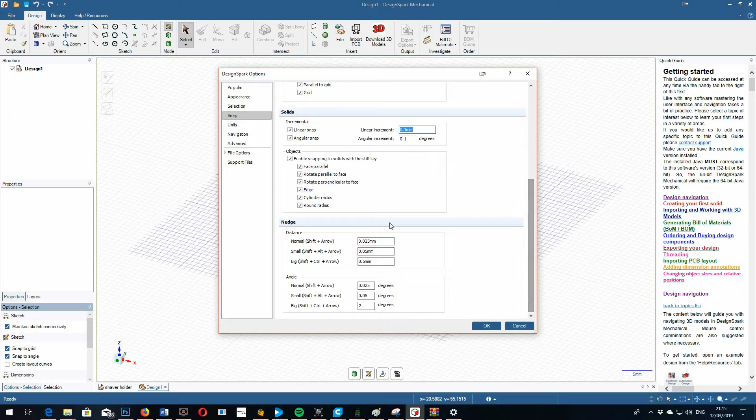So in here you can change those snap settings if you can't quite click on the line, but for the most part you'll just be able to click on the line. It'll automatically click to the line.

So there's three modes in here. There's a grid mode where you draw onto this grid, and then you've got this hatch mode here which is partial grid and partial 3D, and then you've got full 3D mode which is just 3D in 3D space.

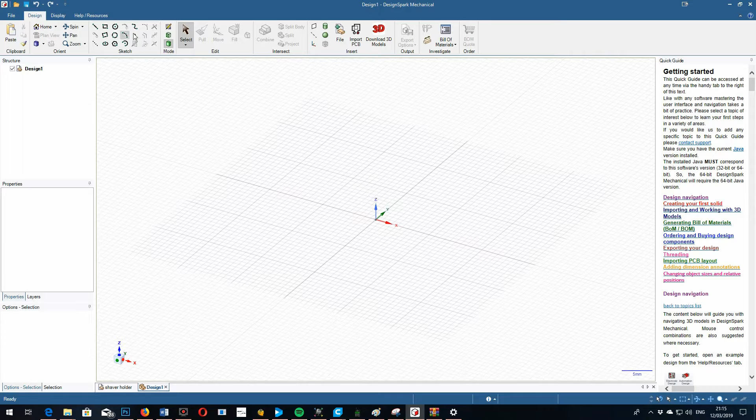Some of your drawing tools you've got here: rectangle, a three point rectangle, circles, arcs and stuff like that, splines and things, so your basic drawing stuff. These are really all you've got to play with. You haven't got to do much other than that.

So I'll just show you what you can put in your basic shapes here, but I very rarely use any of those. So if you click on the grid like that, and you just click anywhere, if you type V, it will come to an over the top view. So this view here is an over the top view.

So if you wanted to draw, the way I always do it is I always normally start side on or plan view, it doesn't matter. But say if you're doing a charging base, let's just show you for instance.

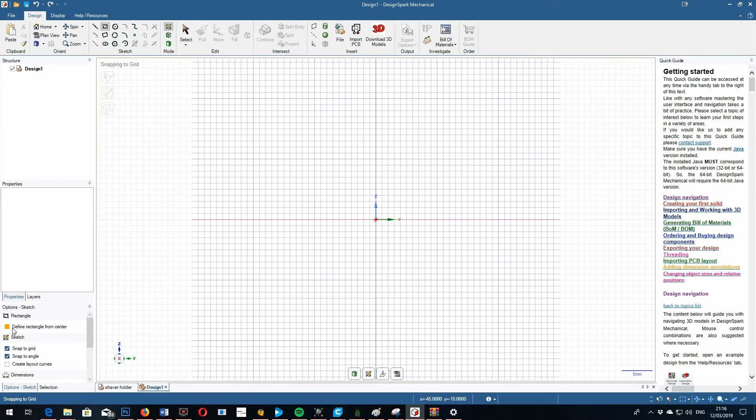Now if you pick up a rectangle there, if you want to make it a rectangle base, if you click on define the rectangle from the center and you click in the center of the screen, it'll actually define it. As you click and hold, it will define it, and you'll see the scale coming up on the side there.

If you press and hold the space bar, like that, you see how that's highlighted 36. That will be your width, so you can change that now to anything you want without having to drag it. So let's make it 50 mil wide, say.

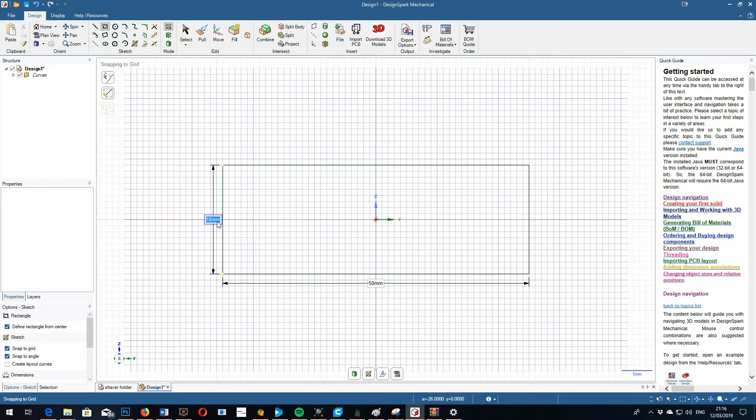Okay, and then you'll see automatically it's changed to the depth dimension there, but you can tab between the two. So if you press the tab key, it will change between the two there. So if you click on that one, so if we make that 30 mil high, so side on, that's now 30 by 50 in size.

If you press enter or press escape, that will get rid of that for you. So you've got your basic shape.

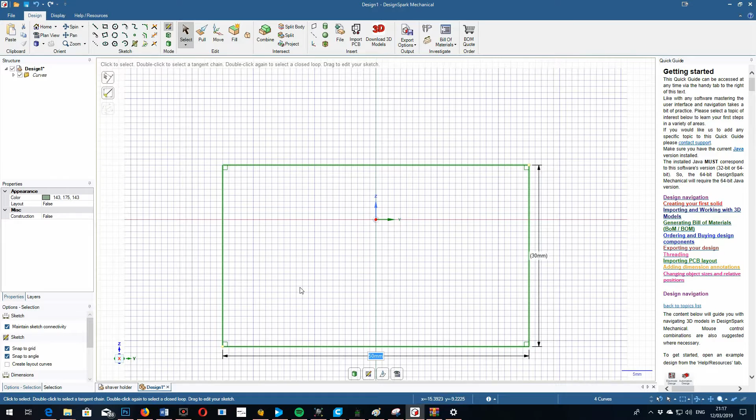Now if you want to move this shape onto the line, if you double click one of the lines, it will select all of the lines like that, you see, and then you can actually go to this option here to move, and you click on the green arrow in the middle there, not the red because that's left and right, it's this arrow here, because remember you're still working in 3D here.

And then you can bring, if you drag that circle and you drop it down to this line here, you see how it's turned to a square? Well, now it'll actually move. This is the origin of the object now, so it'll actually move from this origin point.

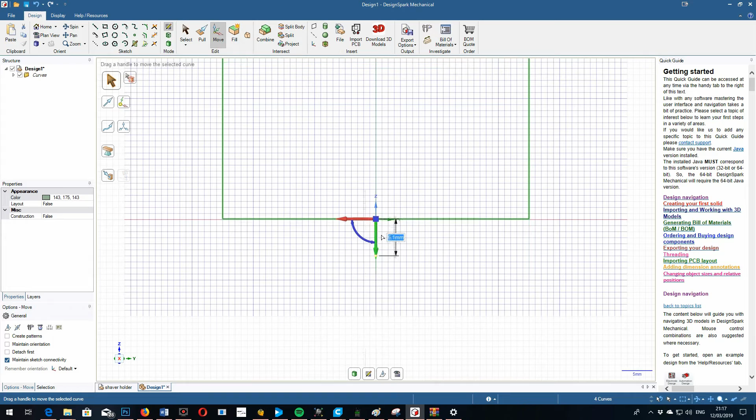So when you actually move up there, it'll actually drop it right on the line for you, more or less. My snap's a little bit tight, but if you put a cross in there, it will definitely drop it. It'll drop to the intersection of that line.

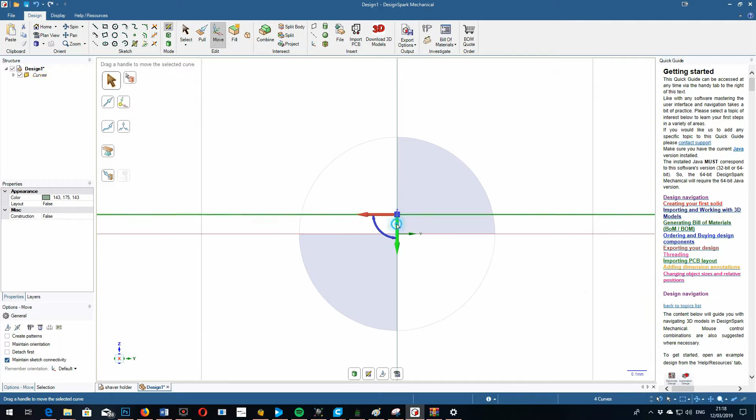So if we have a little look and see how close that's got, yeah, because I've got a very fine snap I'm working with on here. So if you click on the arrow like that, and then you see it's dropped onto the grid now.

Okay, so now it's important to try and keep the object on the grid. It just makes things a lot easier.

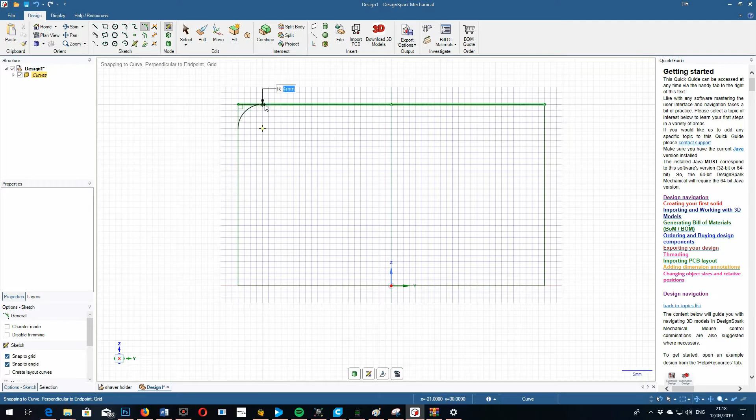Now what I find is it's very tempting to put rounded corners on now for your shape, which you can do if you go up here and click on rounded corner, click there and there, and it will do a 5 mil radius for you. But you can do that afterwards, so you don't need to do it here, but you can if you want to. For instance, you could put another radius 6 mil there, and you could get carried away and do an even bigger one there. Oh, hang on, like that, okay, odd shape.

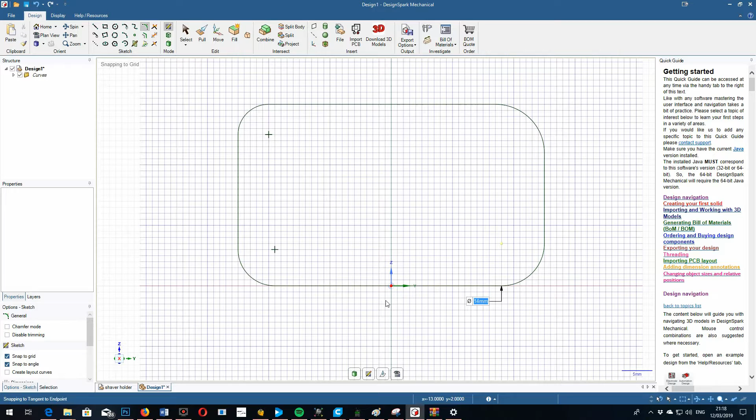But if you don't like any of that, you've got multiple undos here, so you just click undo, undo, undo, undo, and it'll go all the way back to where it was. That's really useful, the undo feature, and you can keep going back on that and go all the way back. It's amazing.

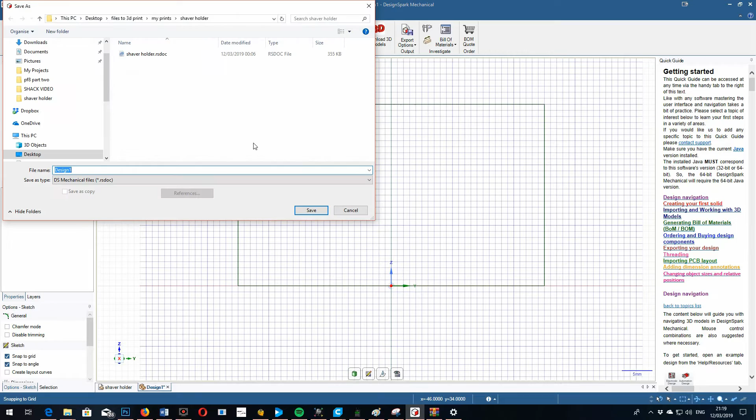What you want to do before you do anything, in case it crashes, is save it. So first you click on save as, and then you save it somewhere and just call it, I don't know, Lewis, like that. That's not saving it as an STL, you're just saving it as an RS design document at the moment. This is not about exporting it.

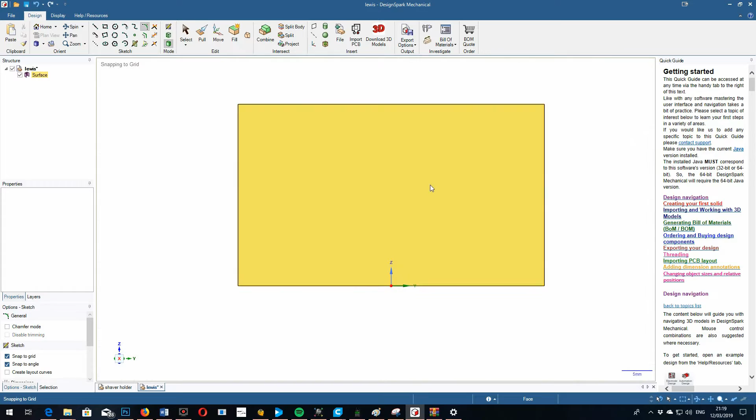Okay, so that's very basically your very basic shape, but you want that to now be in 3D. So what you can do when you change to this mode, you'll see how that's changed to a solid shape now, which is flat.

If you imagine in 3D space, if you go to the spin option here, you click on that and you click and hold the spin, and then you can spin that around in 3D space. You with me?

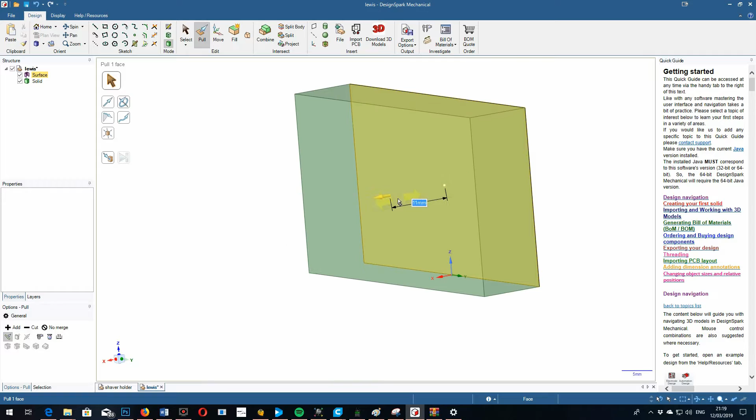Okay, and then what you do if you want to fill that out is you click on pull, click on the face you want to pull, and hold, and it will pull that face out. So let's say we want to make this base 50mm wide. Again, you can either drag it out to 50, or you can press the space bar while you're dragging, take your fingers off, and then type 50 in there, and that's got your 50mm.

And then you can spin around. There's your 50mm shape. If you've got a wheel mouse, wheeling in and out zooms you in and out, so you can spin around.

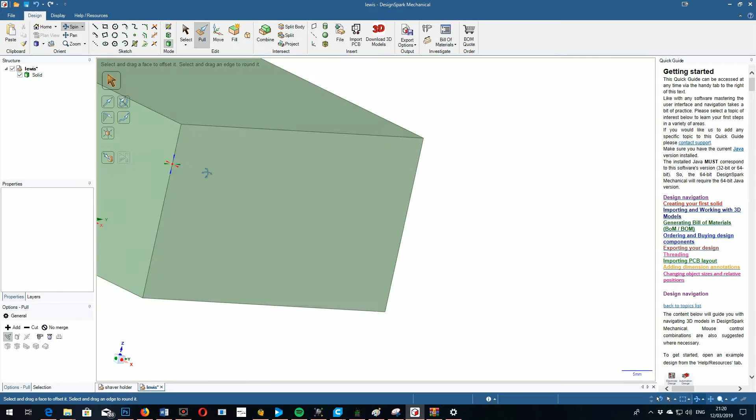Now what you can do here is, if you want obviously to get a cutout in the top of it to drop something in it, you spin it round, click on select, hit the face that you want on the grid, and then press the V button, and it will orient that top down so you can see it. Then you need to put the grid on top of it.

Anything you draw on this grid will be added to the shape. If you don't want to add it to the shape, you can pull the grid off of the object that you've got. So if you click on that move grid icon, and then spin the object round like that, you can click on the grid again, click on that, and pull that arrow, and it'll pull the grid away from the object. So you can pull it away, and that way whatever you sit on there is not going to be added to the object, it's not going to join up with it.

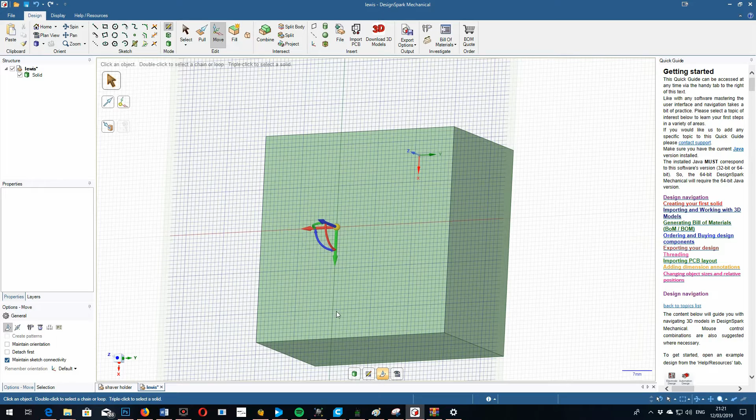Okay, so if we do that, if you press V again, now we're hovering above the object, so what we create here will not be added to the object.

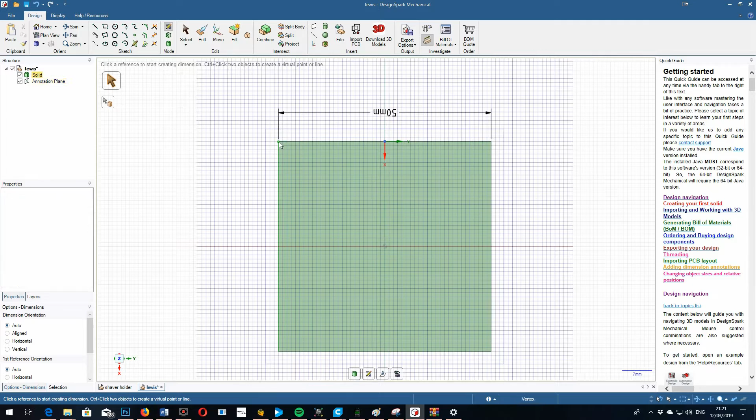The other thing you can do, if you're not sure about your dimensions, is click the little dimension thing and you can get the size. So you can see here we're upside down, but it's 50mm, so we know that's 50mm - it's this little ruler thing. You click on there again, and you can see it's 50mm square. You can turn these off if you don't want to see them; in the annotation plane, just switch them off and they'll go.

Okay, so what you do then, say it's a docking station, you click on your rectangle. Remember, define the rectangle from the center and draw in your shape roughly. So let's say that's going to be something like that, for instance. Okay, now that isn't on the actual object at the minute.

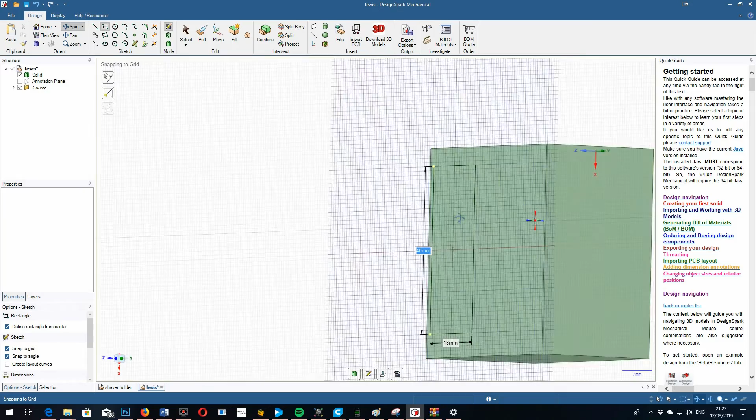If we put that into spin mode, you'll see that the grid is hovering. You see that? It's hovering above the object, right? Press V to square it up again to get your view straight. Then, if you click on pull, you see how it changes to 3D mode. You see how this now is a square there and a square there, but they're separate squares.

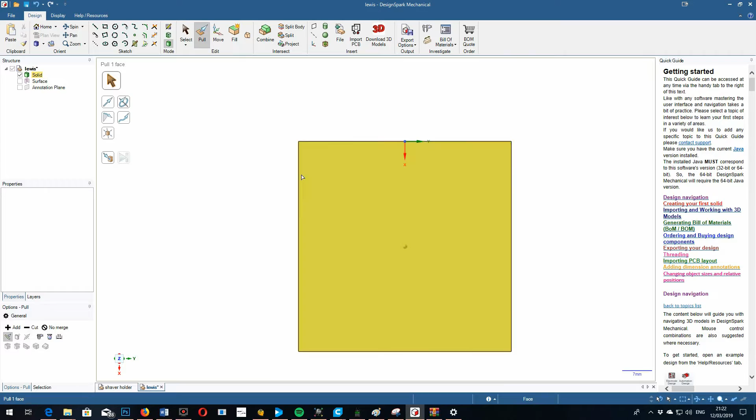See here? Surface, you can turn these surfaces on and off, so we can make that disappear, look. On, off. Okay, same with that one. On, off. We can hide ones, so it's really useful this. You can hide whichever surface you don't want to play with. But what I'll show you here is how you cut a hole through that. That's probably quite a good one to show you.

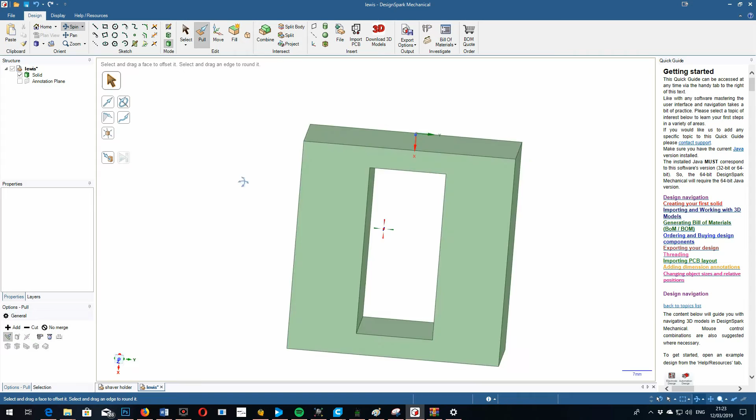So if we spin this round, if we click on the pull feature there, you notice over here you can either add material when you pull or cut it. If you don't do anything, it'll cut it out. So as you drag that shape through, look, it's cut a big hole through the middle of your base. Obviously you've got your undo, so click on your undo, click again, there's your undo.

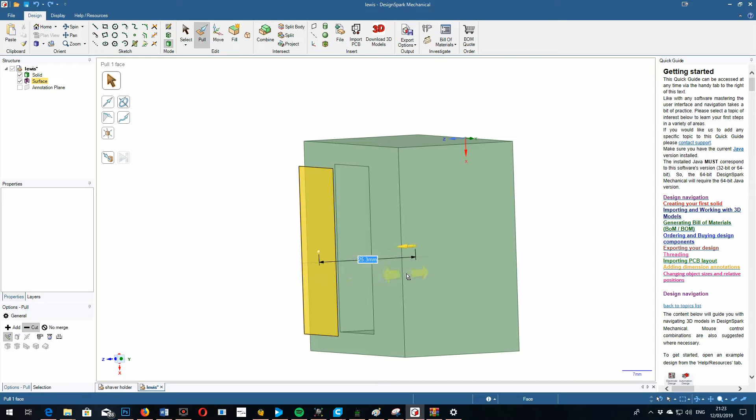Okay, so we want this. There's other ways. If you lay it flat on the base, you can measure how deep the hole is. But I'll just show you here. So we'll do cut, and we'll just drag it into there. You see how the distance changes there? That's the distance away that it's going to cut. That's not the depth of the hole. It's the distance from the top.

So we'll just drag it down, say that much. You can do this more accurately if you want to. But there's your shape, your basic depth. You can measure this if you want to, you can see how deep it is. So you can click on either this one, which is for the dimensions, or this one, which is the calipers feature, which is quite useful.

Let me just see how long this video is. I was just checking that was recording. It was recording. So yeah, where were we?

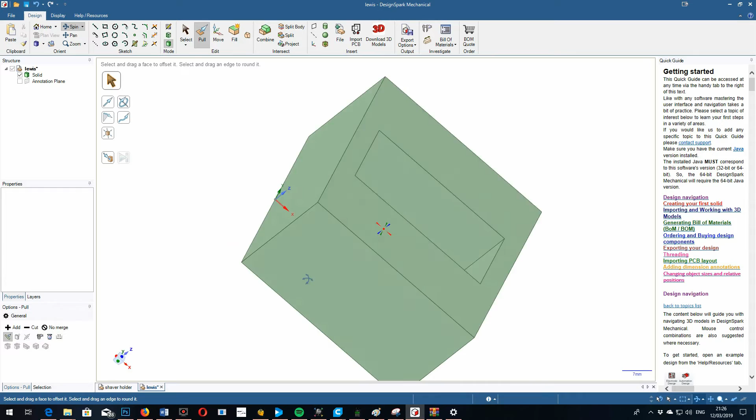Okay, we've got our basic shape cut out in the base there, Lewis, as you can see. If you wanted to measure the depth, just click on the calipers, click on that little line there, and it shows you, look, 17.8 millimeters deep that is. So if that isn't deep enough, you press escape and then go back and select your pull, you can make it deeper.

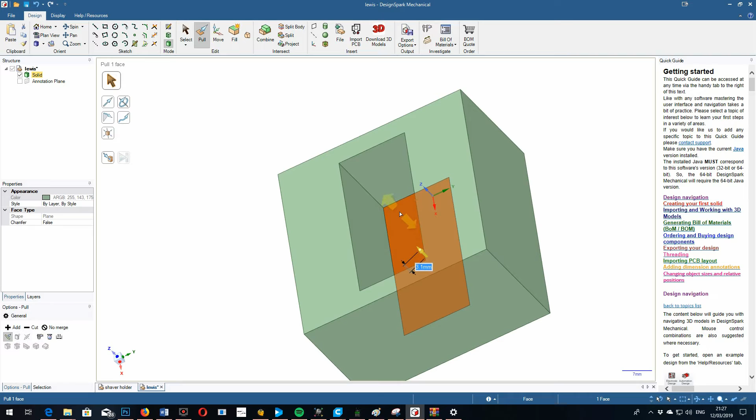And so you're 17.8, so now you've got to do a bit of maths. Look, you've got 20.8 now, haven't you? Because you've gone 3 mil down, or 3.1. If you press the space bar, like I said, then you just type in the depth that you want, okay? And then again you can spin round.

For moving around the object, if you click and hold, you can spin. If you hold the shift button while you use that, you'll move it left and right, okay? Zoom, I use the mouse wheel in and out. You can pan around with the left or right mouse button, okay? So if you press escape.

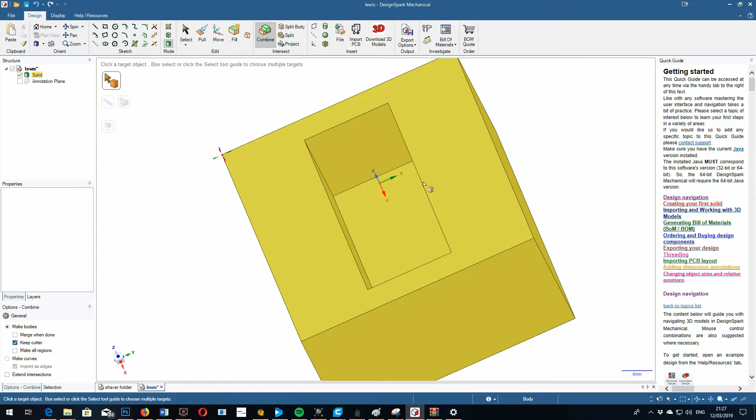Okay, so we've got our basic shape here, but Lewis says, oh, I think I want it a little bit more rounded. I don't like the sharp edges. That's easy. Now, if you want to make all of the edges soft, so say this top edge, you want to make this rounded, round the top, make it a bit better looking.

If you go to pull, I'll show you on the one edge. If you click on just one edge, you see the options that come up. You've got rounded, chamfered, you've got extrude the edge. So you can pull just that edge up if you want, or you can pivot the edge so it's got a slant on it, okay? Most of the time you'll be using the rounded edge here.

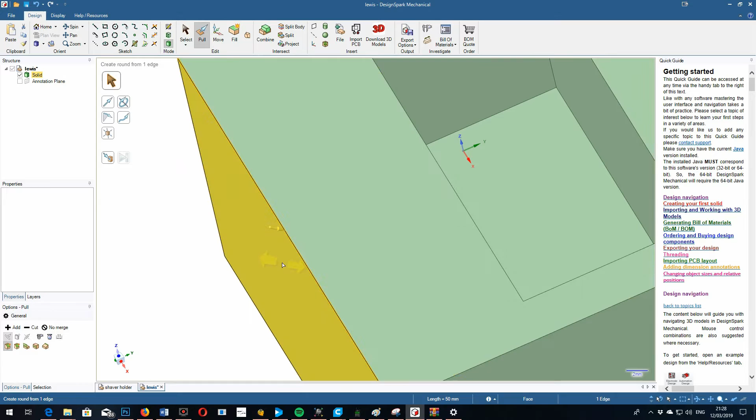So if you click on that, so the edge is only highlighted. So not this, not that, just the edge like that, okay? And if you click and hold and drag, you can round it, just go up and down with the mouse like that. It'll give you a nice smooth edge.

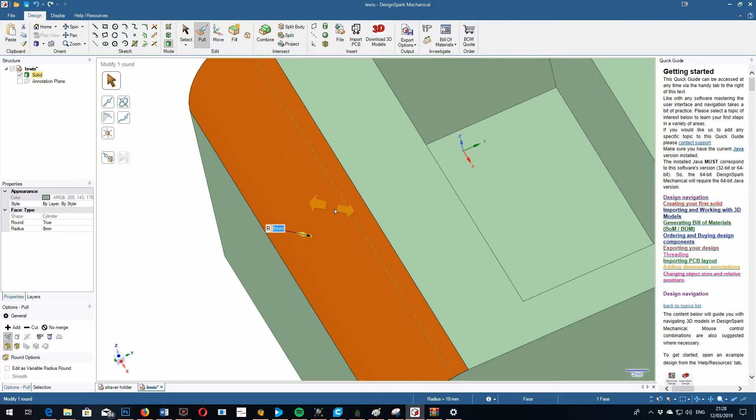So let's take that again, hit the space bar. Let's give that a 10 mil, a nice rounded edge of 10 mil. It shows you on there. If you want to change it, while that's highlighted like that, you can put in 15 in there and it makes it bigger, or you could type 8 to make it smaller. You with me? So while that box is highlighted, it lets you change the radius of the bend. Okay. Press escape, zoom out with the mouse.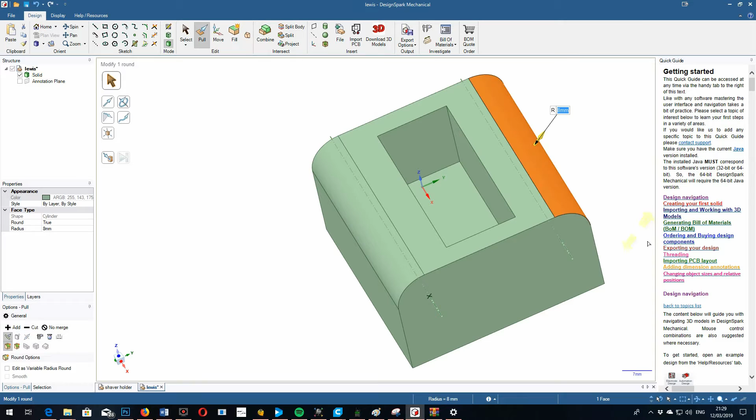A tip: when you get the pull feature on, you can inadvertently pull with your next movement. So if you press escape or press select like that, it will get you off of it, so you won't do that. If you think, oh, I've just bent that and I don't know what it was, just click the calipers, click on there, and it shows you cylinder diameter 16, fillet radius 8. So you can pull that one to the same. Click to the edge, click and pull, press your space bar, press 8, and it'll do that one exactly the same. Press escape to get rid of it, okay?

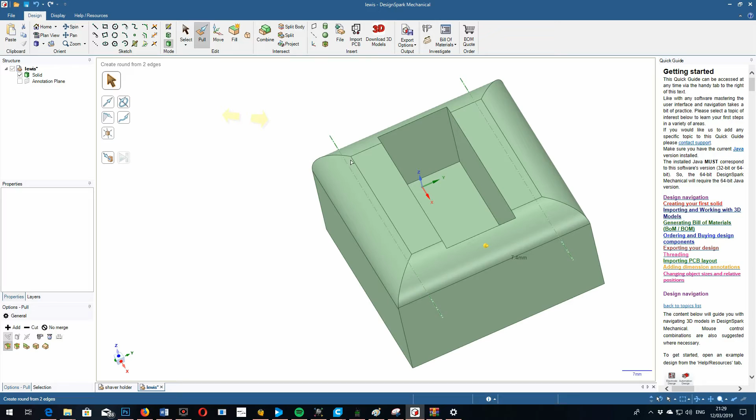And then if you want to do these ones equally, click on that one, then hold control on the keyboard and click on that one, and it will do them together. So now when you pull like this, you don't have to click on it to pull it, you can go over here, and there you go. Let's take that, space bar, take it to 5. I think that would be enough. Right, it already did it.

Hang on a second. Yeah, it crashed on me, so that's why it's important to save what you're doing. We'll go back in there, this is annoying, it brings up this splash screen. I'll quickly get back to where we were.

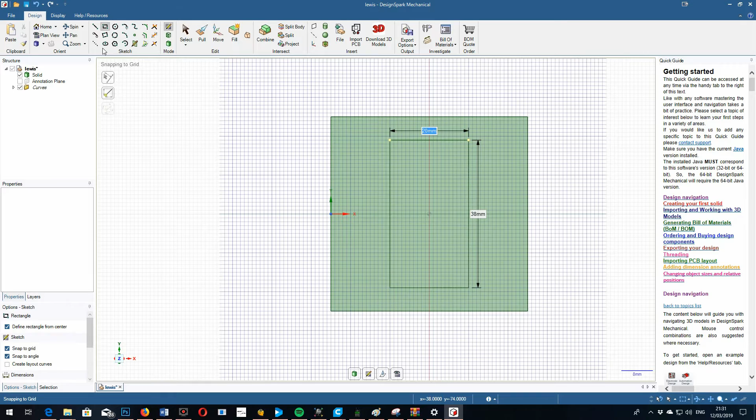So press the V to get it that shape. Get your rectangle in there, define your rectangle from the center, click, get your shape, boom, like that. You can leave it on here for this application, it won't matter. Spin it, change the mode, pull it down. Now you can get your depth from the surface there. Hold the space bar, 20 mil. Okay, there's our 20 mil. Spin, so we can have a quick look at it.

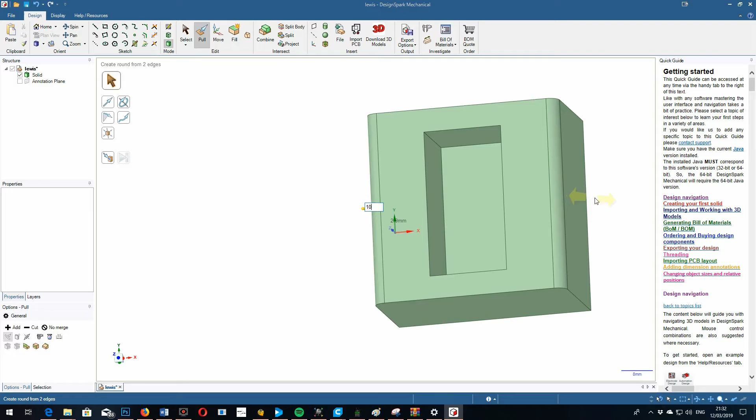Right, pulling the edges to round them off. Click one, hold control, click the other one. Let's pull and give them a 10 mil radius. Okay, that's enough. You can do the sides as well, pull these faces as well if you wanted to. But I think that's probably fairly good, isn't it? That looks alright. Now if you wanted, you could put little recesses in the bottom. I'll show you how to do that.

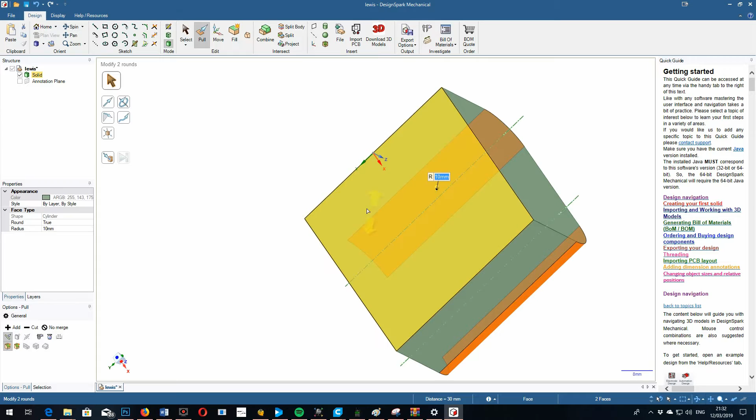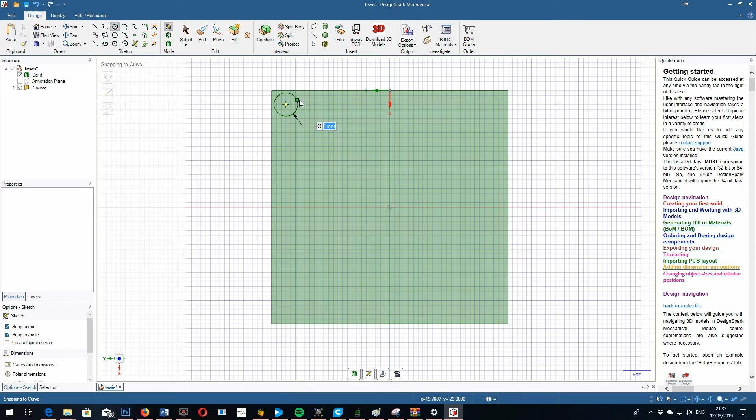Press escape, press select, click on that face, press V to get it the right way up, put the grid on top of it, and then you can just draw your little circles for your feet. Just click on there like that, make those 5mm, okay, and then they're probably a bit near the edge, so if you click on these you can move them. Oh hang on, I sometimes do that.

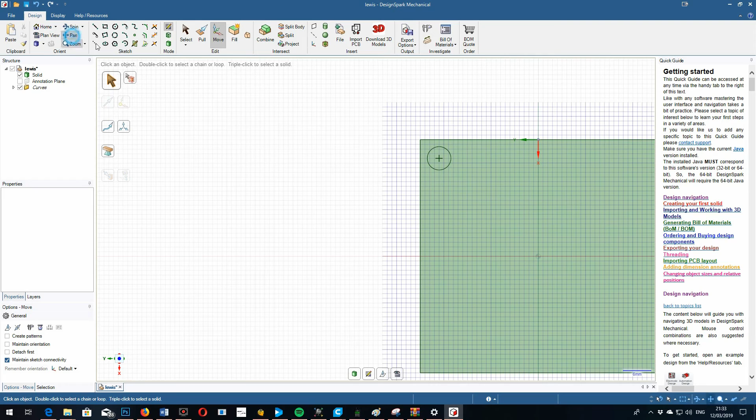Click on move, click on that, zoom in a little bit, hold these green arrows, and that will bring it down to there, and then across like that to there. That's just dropped it down a little bit. Zoom in and out with your mouse. If you're happy with that, then you can just copy it. Now there is a mirror function in here, but I don't really use it. What I tend to do is measure stuff, or you can draw a little square into the corner like that.

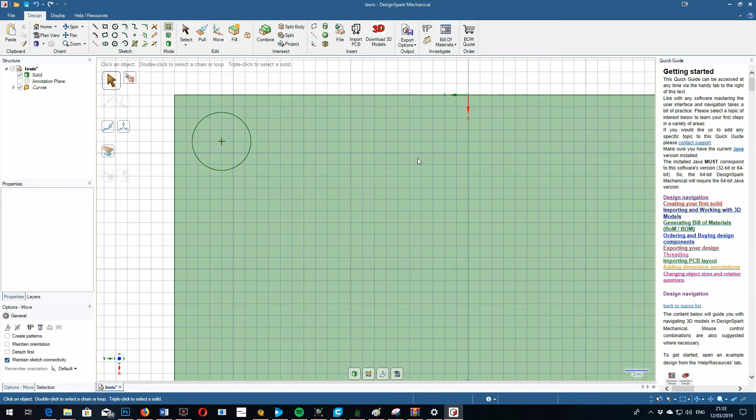That's another way of doing it. But if you count the squares, that's 1mm. 1, 2, 3, 4. So that's 4 squares in, and 1, 2, 3, 4, 4 squares down. And if you forget the diameter of your circle, click on the little calipers, click on there, 5mm. Press escape, and then click on pan, go across there.

So you're 4mm in, get your circle. Okay, so you go 1, 2, 3, 4, and then down 4. 1, 2, 3, 4. Click on there, drag it out, hold the thing, 5mm. There you go. There's your circle. And then you basically just do the same thing for these ones here.

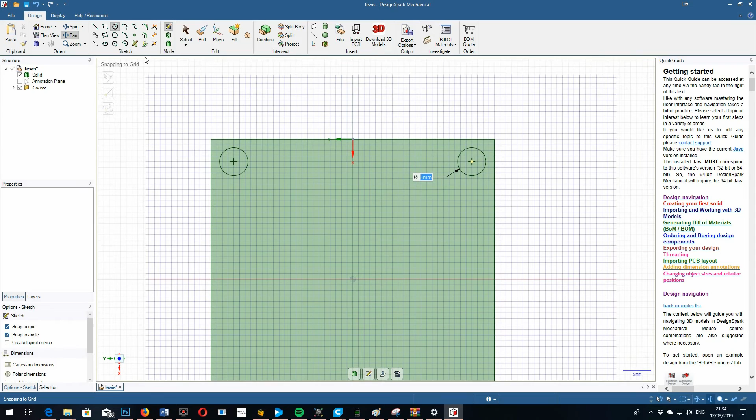And then if you want the indent, so you can put a little rubber pad in, like I sometimes do. Change your mode there, so it's in 3D. Spin it. All right. Turn it there, so you can see both of these. Click on pull, click that one, hold control, click that one, okay, and then just pull it back, and then hold spacebar. Let's make it 2mm deep, and then press escape, and then you've got your little recesses, like you see.

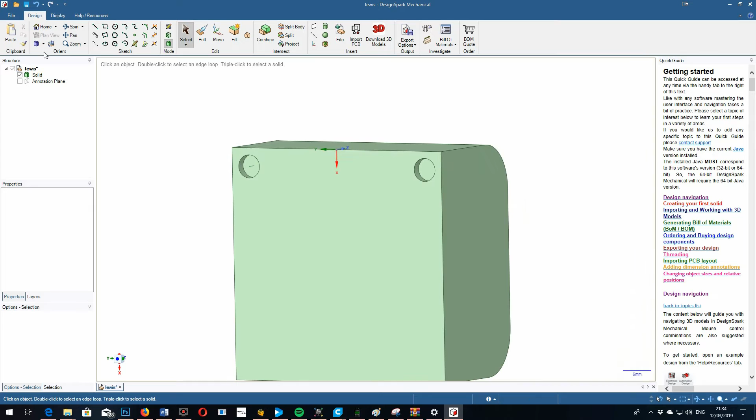Now if you want to, when you're in this mode, because at the moment it holds shift and then you can pan, at the moment you can't really get an idea where that base is really, because it's a solid lump. Okay, so if you go over to display and change it from shaded to wireframe, right, and then go back to design and then spin, look, you can see now in the wireframe where that base finishes, you see.

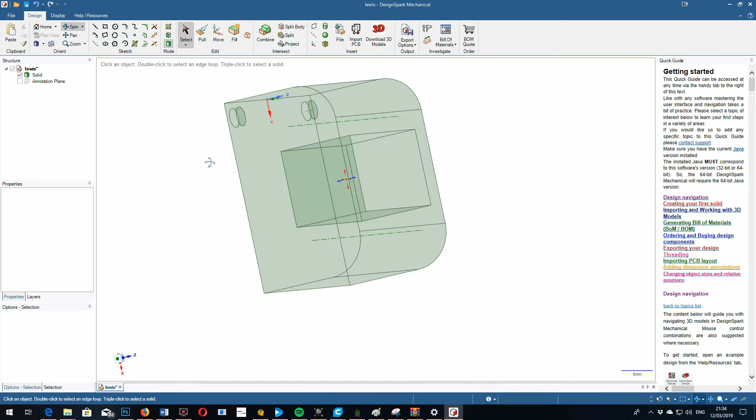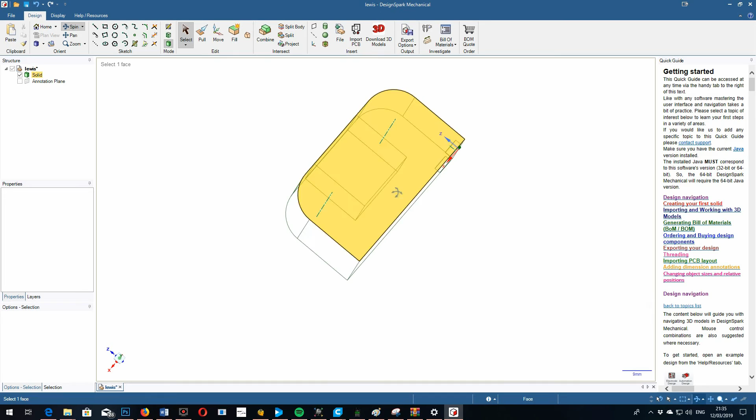So you can see here that there's the bottom of the base and there's the bottom of the unit. Yeah, you got me? So that's quite a useful feature. If you can't quite gauge how deep something is, change how it looks, so it's just a wireframe model like that, and then that way you can physically see how that line is compared to the actual depth of the base there. It's quite a useful feature to do that.

So yeah, that's really how you do something as basic as that. There's another thing I want to show you, because I don't want to make this first one too long, otherwise you'll never watch any of these. Like I say, you can turn these off. So we'll save this though, because that's important, because you can see it sometimes does crash. So get used to regularly saving it.

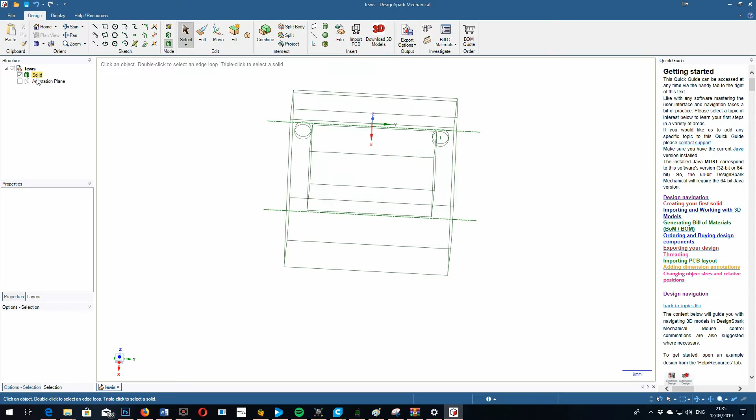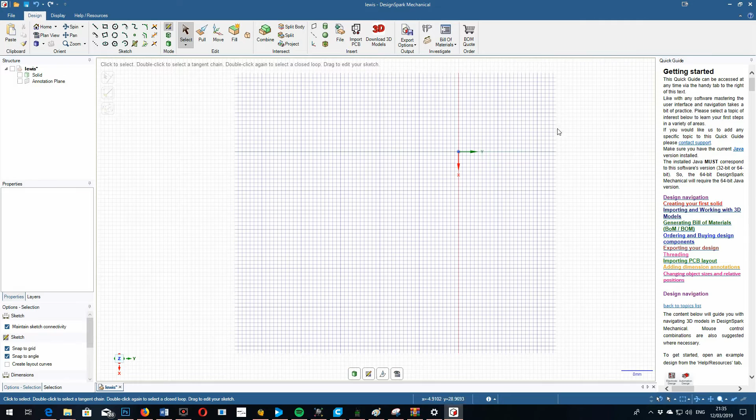I think there's an option you can auto save. It will do it regularly. So if you don't want to see that, you can turn that one off now. Okay, and then the minute you create another object, it will come up on here as a solid. So if you just click the grid anywhere you want, click V for view, it will straighten the grid up like that. Okay, you'll notice this grid only spreads as far as the object you put on it. I find that a bit annoying, but it's just the way the program works.

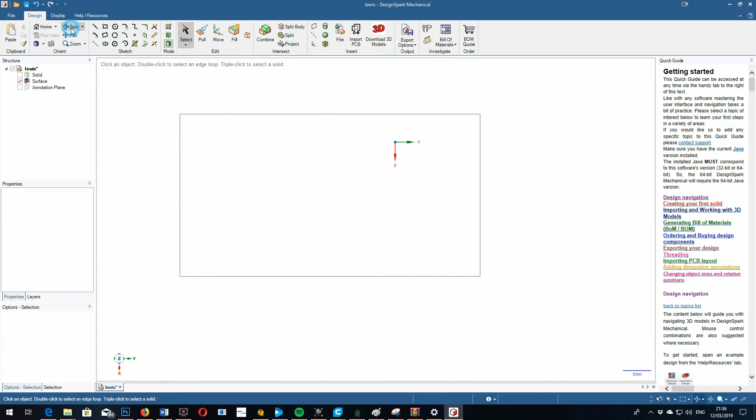So I'll show you another way, something quick. If you're making like a project box, so if you wanted to make a box to put something in, just draw your square, press spacebar if you want to put exact dimensions in. If not, just do that, and there's your basic square. Change the mode to 3D, click on spin, turn it, pull. See how quickly you can do this. Get your shape, get your depth of your box, press spacebar. You want a 30mm box, I think, something like that.

Press escape. Okay, you're still in wireframe mode now, so if you go back to the display, change the graphics to shaded, go back to design, spin, and then you've got your little project box here. You've got your basic box. Now they offer a really nice feature on this for cutting out the box. You see there's some options up here which give you split body, split, combine. This one here is really useful.

It's called shell. When you click on this one, it will remove one of the faces and create like a shell. So say for instance this was our box, you want to take this lump out to make a case, right, to put something in. So what you do is you click on that shell, and then when you go over here, you see how when you hover over the mouse it comes up with this thickness here. Now that's the thickness of the case that you're going to make, the indent.

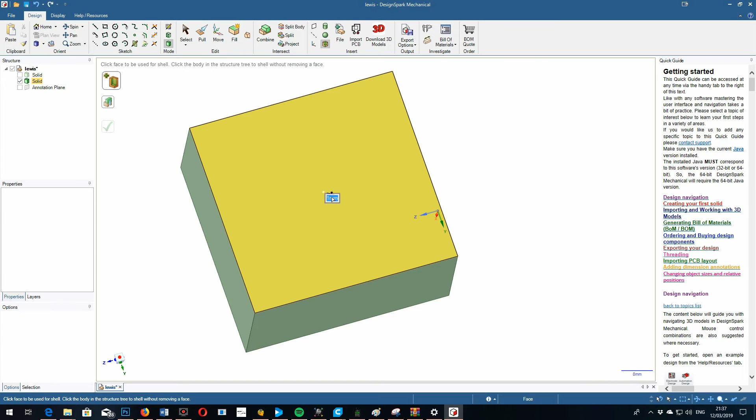So for most cases, 2mm is enough, 2mm thickness. So if you type in 2 in there, you press enter, and then you click on that face, look, it just hollows it out straight away. How good is that? I mean, you could do that by putting a square over it and lowering it down, as I've just shown you, but it just makes the whole operation so much quicker.

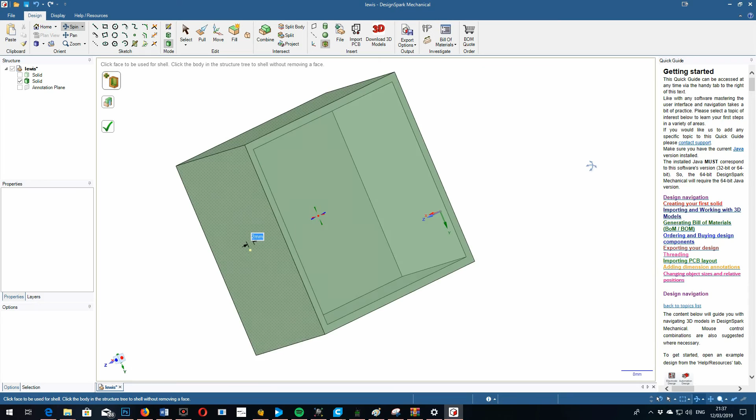You see that? And so instantly you've got like a little box. There's a slicing feature there which you can use for a split body, which will make a lid for it as well, so you can do that. You can put fixing holes in the box as well. That's quite easy. I'll just show you how you could do that with this one.

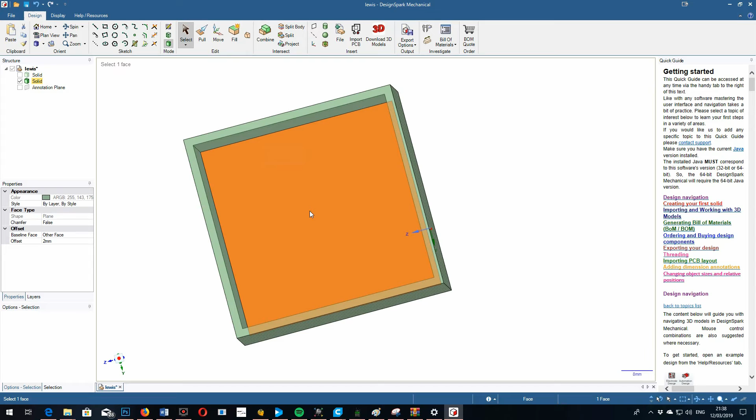So if you select this, which is your base of your box, that's where your fixing holes are going to come up from. Press V to square it up. Put the grid onto it, then go into the corner and get your circle started there. Take your circle up to the edge. You can either move it to the edge or pin it to the edge. If you do that, it will be naturally inside the plastic anyway, so it doesn't matter if it overshoots like that, because it's going to be molded, manufactured like that, as long as they're all equal.

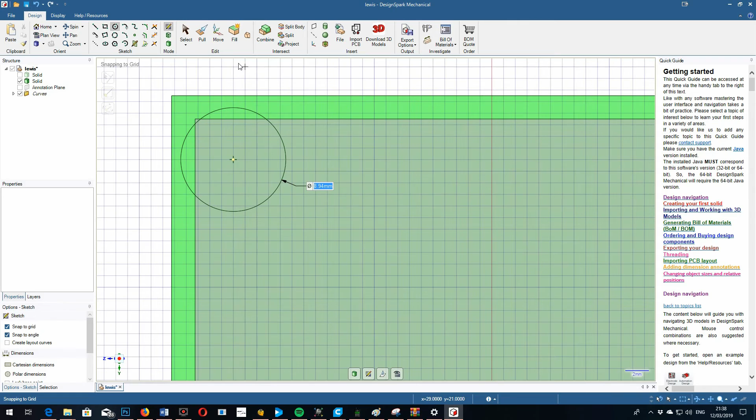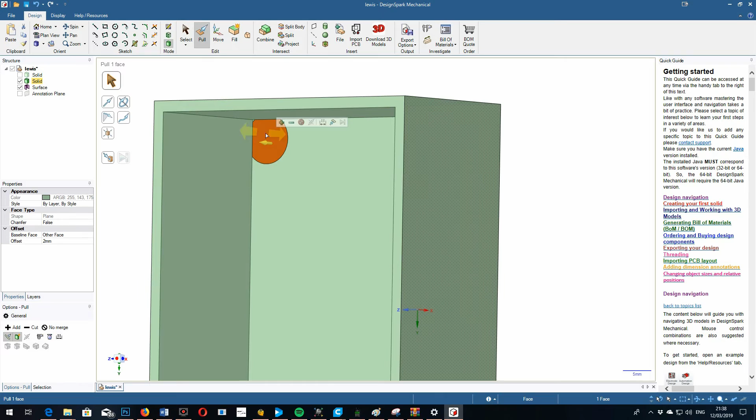So then if you go back to the 3D mode in there, you can see you've got your shape there, look. And if you spin it about a bit, this is a really useful feature. You'll like this one. Save you having to mess around pulling that to the right level. You see this here? You've got Up To. When you click on pull, so you click on that object, pull there, so it's orange. When you click on this, Up To, it will pull this up to whichever surface you want.

So you want this, say, to go to the top of this edge here. You click on that, look, and it pulls it right to the top. See? That's quite a useful feature. Now you can pull it down if it's too close and you don't want it there, that's no problem, you can do that.

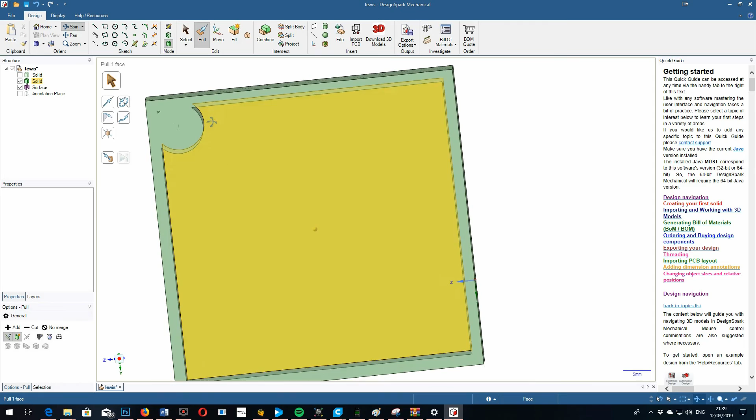So you'll see now that if you want to get your hole in there, that's really quite easy, because you just press select, you click on that, press V, zoom in, put your grid over the top of it, get your circle in there. Now you see how it's giving you the center, look, it's automatically picking the center up. You click on it, put the size of the hole that you want, like that, press space, get your hole in there.

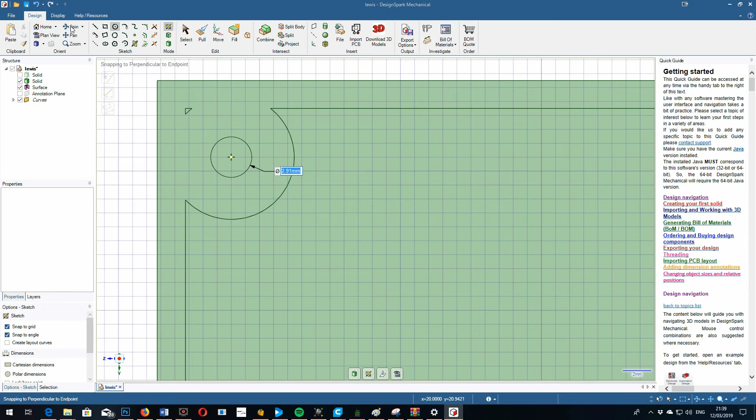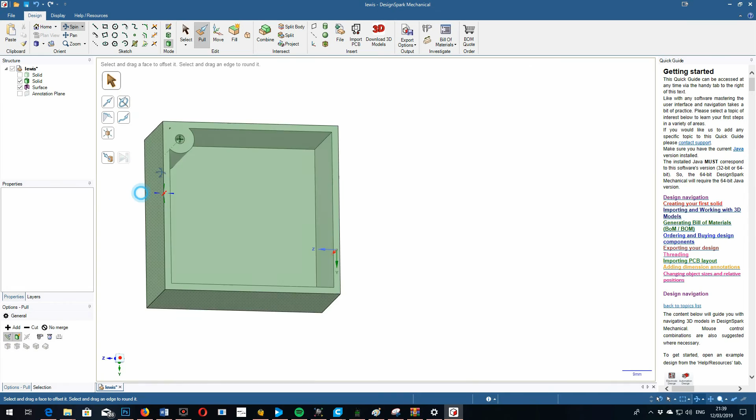Click on spin, and then in 3D mode, like this, spin, turn it, and zoom in and out. Zoom out a little bit, and then select pull, click on that. We need a 10mm hole there, 10mm, and there you go, you've got your 10mm hole in your fixing thing. You can put a self-tapping screw, or you could put a threaded hole in there, and then you can just copy that and do it all round the box.

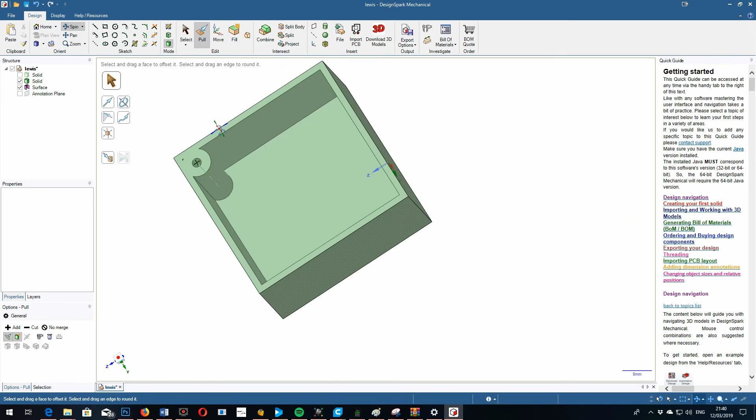And you can either manually draw a lid on, or there's another way of adding the lid, where you just put a line across the top of it and it will slice it and create the lid for you. But yeah, so that's how you create a basic box, and the same applies here. You can make it wider. Look, if you wanted a bigger box, just pull on the one side and it will make the box bigger. If you want to make it deeper and shallower, it'll do that way.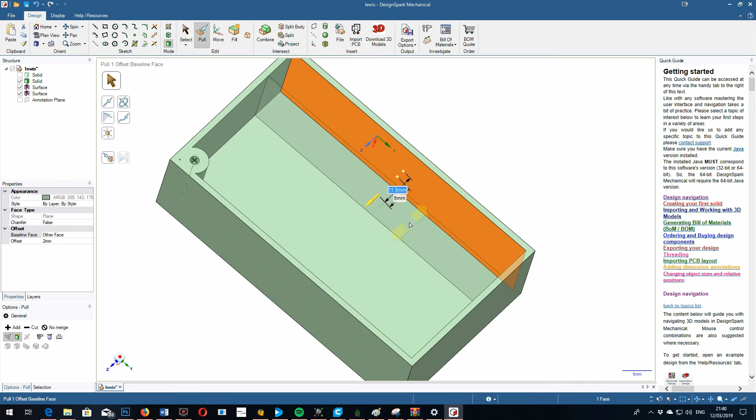And then if you want to make it thicker, you hold control down and it'll make that one side thicker. You see how it's done there? So if you hold the control key down, it'll make the actual side thicker, or it'll pull it away. That's actually just pulled the top surface away, so that's not strictly what I wanted to do, but you delete that there. So that's created a copy.

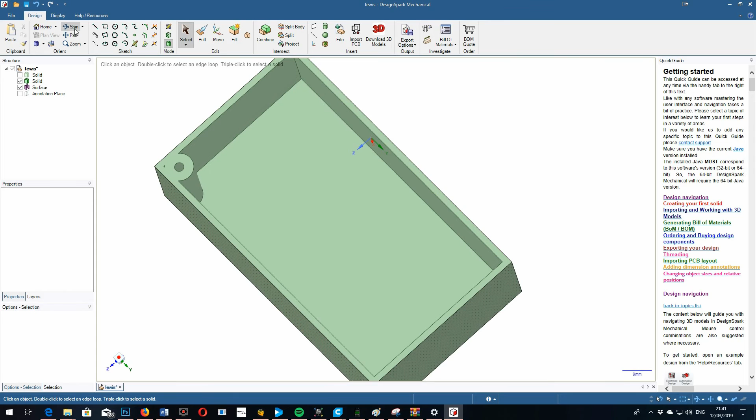That's another useful feature, Lewis. When you're doing the move function, if you hold control down, it will make a copy. So now this is all part of one object, because of the way I've drawn it, but you can actually draw separate objects and join them together.

But if you wanted to actually copy this now and have two boxes next to each other, for instance, if you go over here, you notice how it highlights stuff that's underneath it that's not exposed. If you click on the main solid there, which is that one, we've got a surface there which we don't want, but if you click on that, it selects it all like that, okay?

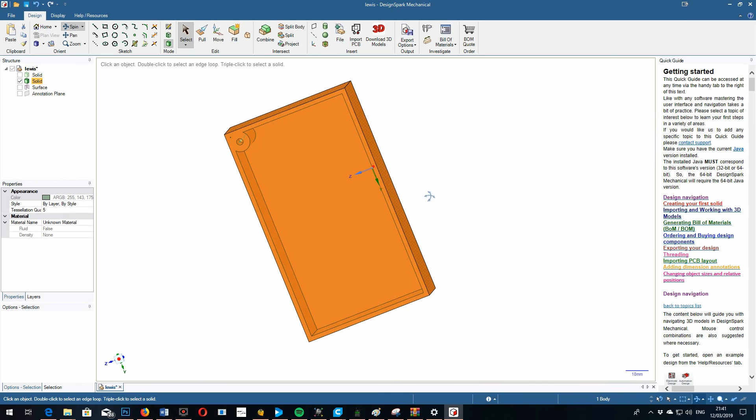And now when you click on move, this will move in whichever direction you want to go. So if you want to go down, it's on the green. If you want to go left or right, it's on the blue. And if you want to come in and out, it's on that red one. But say we want to move this over here, but we want another copy of it.

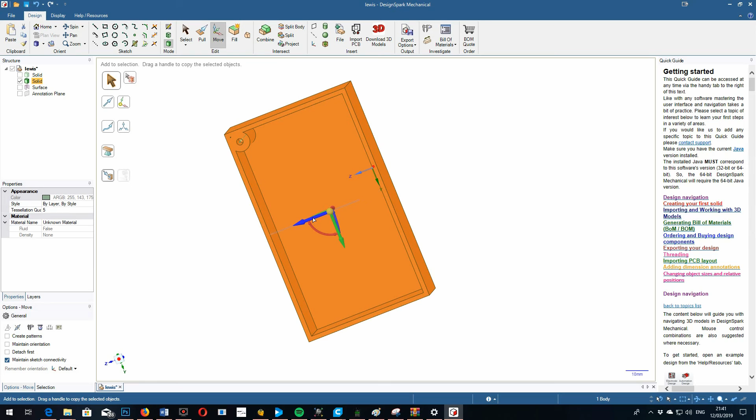If you hold control down while you're on that blue, hold the control key down, then click. As you drag, look, it copies it. So you've got two there. Okay, and the nice thing is that these two stay in the same orientation. So if you want to join them together, or have a hole that goes through that one and through that one in the same place, they both stay.

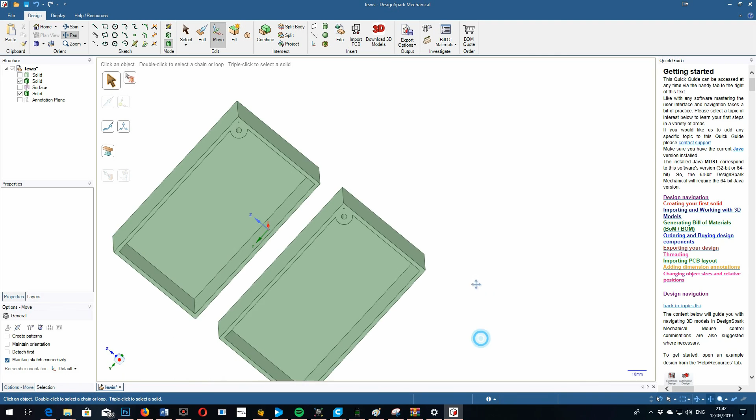No matter how you spin it, they'll stay in that orientation. Doesn't matter what you do, they'll stay there. Unless you physically move one individually, they'll always stay there. And what I tend to do is I name them. So you rename and call that box 1, and then same with that one, rename box 2, and then you can also change the color of them as well if you want.

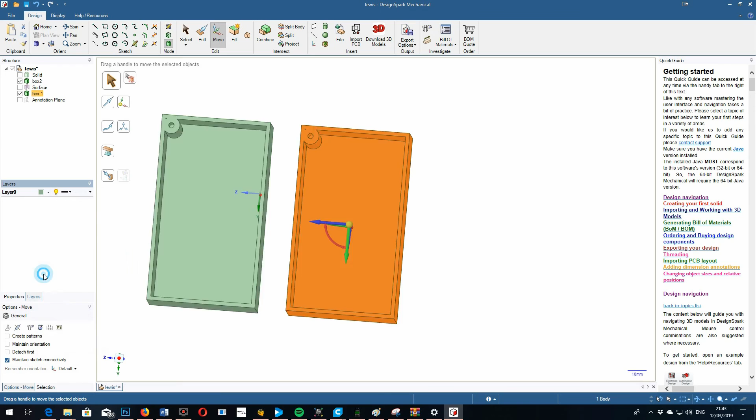So if you want to identify them differently, it's in this one, so you can make it red. Yeah, horrible color. Yeah, I knew it was in one of these. I don't do it too much. I tend to stay with this sort of teal color, this green color. So yeah, you can change each object to make it a different color if you want to identify it differently.

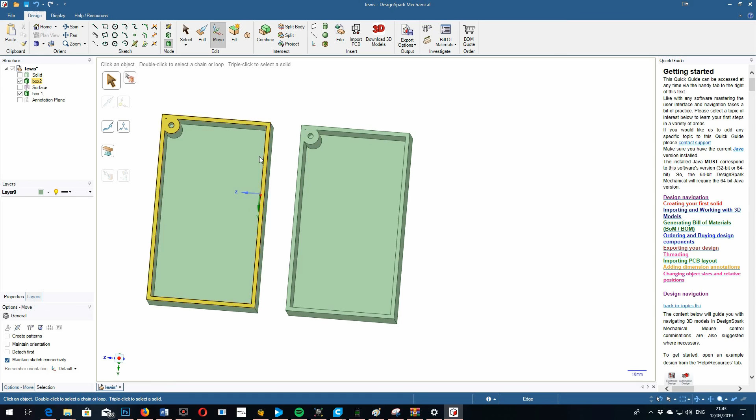So this is just a starter really. There's so much you can do with this, making gears, cogs and all sorts, drawing pipes and all sorts of things. So I think I'll leave it there for now. There's quite a lot to digest in that, isn't there? It's quite a long video. But that's your basic starter, so that hopefully should give you a bit of an idea of what to do. Just have a little play around with it, and if you get stuck, just ask us and I'll give you some more help.

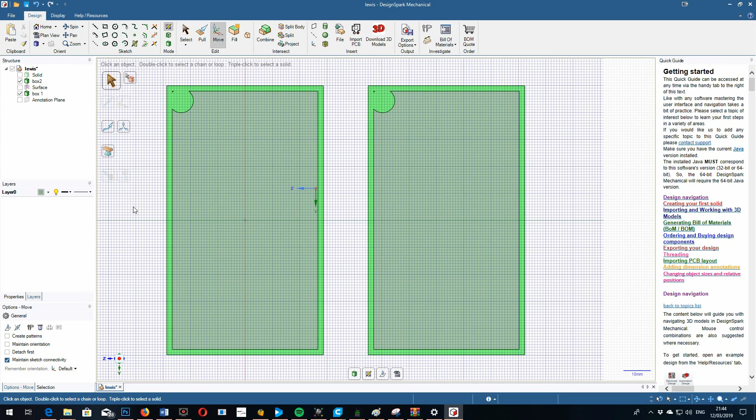But basically it's V to get your view, click on V, and then to get your grid on there, get your grid on. That's how you do that. And then it's changing between the modes, 3D mode to spin, press V to get your view, click on something with select, press that one to get your view to this. So if we spin this and we want to view that plane like that, we select that one and then we click V for view.

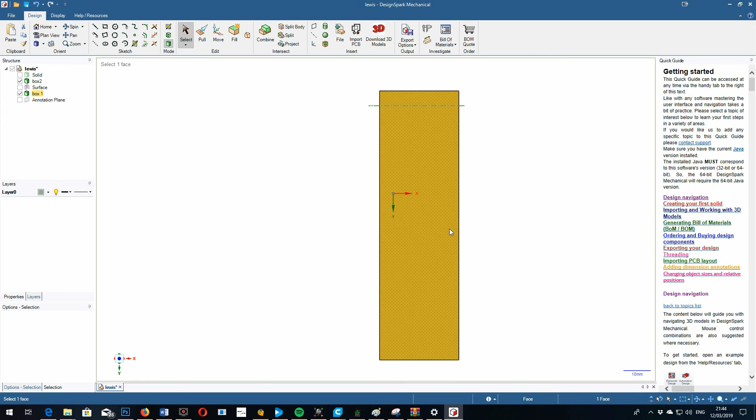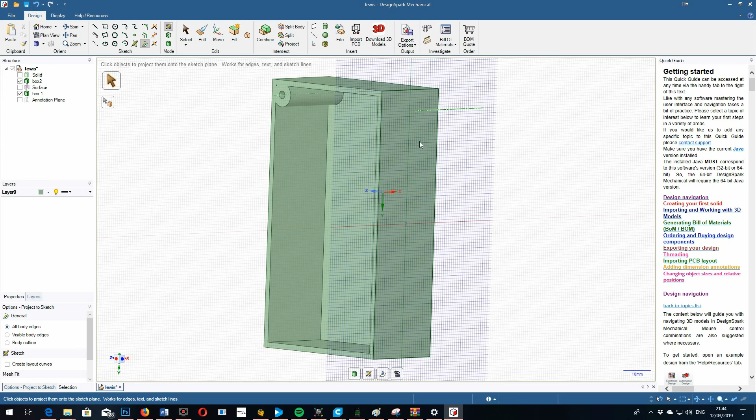But you'll see that as it's spun, anything that we draw now on the grid will be on this box, not the other box. Okay, if you want to get to this box and you want this one to stay there, when you select it, if you go to this option here, project to sketch, it will stick the grid. You see that? It's now stuck the grid on that box, on that face just there.

So now when you press V, you're working off of that box. The other box is essentially behind, if that makes sense. So yeah, that's a really useful feature, that project to sketch. So you can project onto the surface that you want. You with me? Okay.